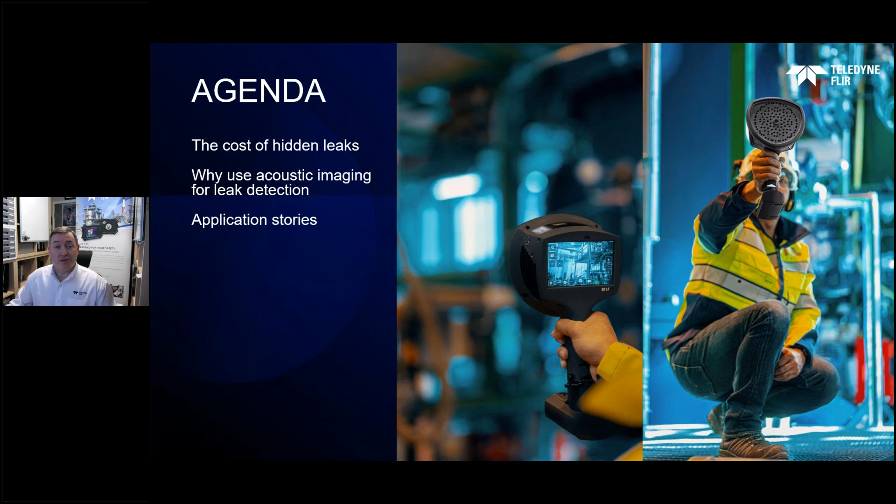So run through a quick agenda this morning. So we're going to look at the cost of hidden leaks, why we're going to use acoustic imaging for leak detection and what the benefits of it are. We're going to cover a couple of application stories of real life results with this equipment. We're going to look at achieving rapid ROI.

Return on investment is a big part of what we look at within Teledyne FLIR with our product range. Obviously, investing in any of our equipment is a big step for customers to take. And what we like to try and do is offer the opportunities to show what that return on the investment can be. And we've certainly had cases with acoustic imaging in particular, which have proved to be extremely fast return on investment cases.

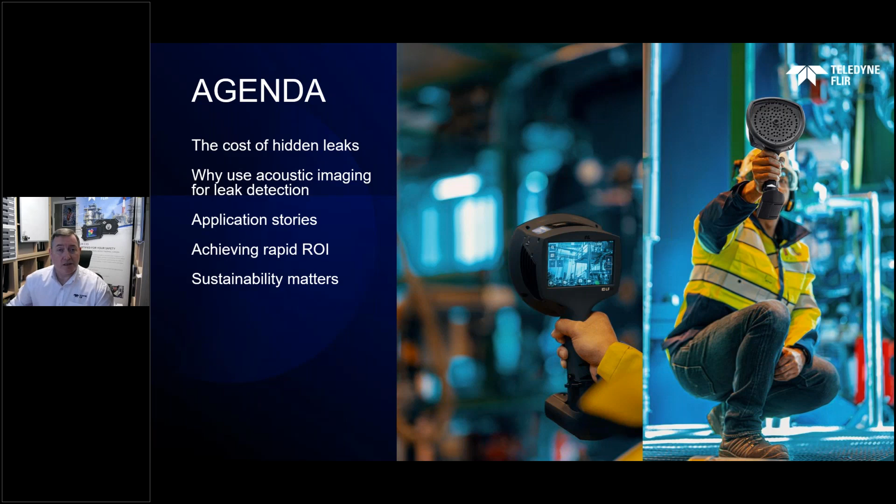We're going to do a little slide about sustainability, which in the current climate is obviously on everybody's lips. We're going to look at introducing the solutions that we have specifically for air leak detection. We're going to touch a little bit on software and reporting, and then we'll have the Q&A session at the end.

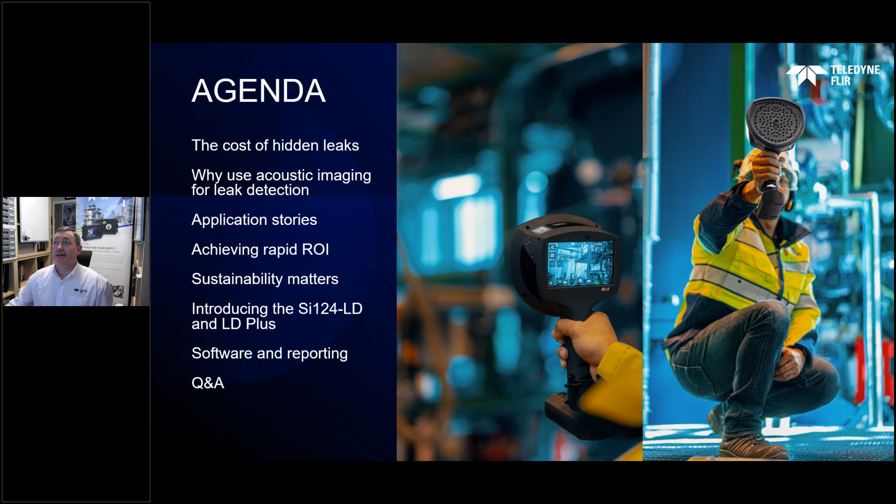So what I'm going to do now is I'm going to get rid of my face from this particular presentation so that you can concentrate on what's on the screen. You'll still be able to hear my voice from the ether, and we shall proceed.

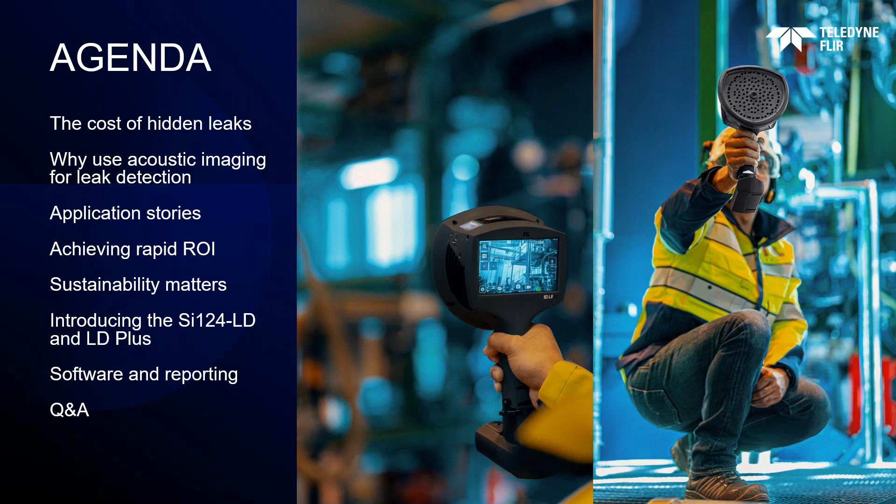Okay, so we talk about the benefits of sound, but more importantly, it's the benefit of actually being able to see sound. And that's a really powerful statement to be able to make with this type of equipment, because we obviously are all aware that we can listen to sound, but to be able to actually see sound and visualize where it actually is located is a very powerful tool. And what kind of benefits can that actually bring when we look at that ability to visualize those sound patterns? Well, we can find hidden problems.

And I can give you a real life case where I did a demonstration with an Si124 in an automotive manufacturing plant. I managed to find a leak in a nitrogen system, which was not at a termination or a connection. It was actually in the middle of a pipe. The pipe was pressed hard against the side of a machine. Every time that machine started up, it started to rub the surface of the pipe, and gradually over time it created a small hole.

Now, with the ability to use an acoustic imaging camera with its wide field of view, I managed to scan the area quickly and locate this particular leak. And upon further inspection, it was literally caused by this friction over time. There was a lot of background noise in this environment. There's no way that you would have been able to find that leak because you couldn't hear it for the start. You would never have seen that there was a problem with the pipe because the hole was on the side which was pressed against the machine.

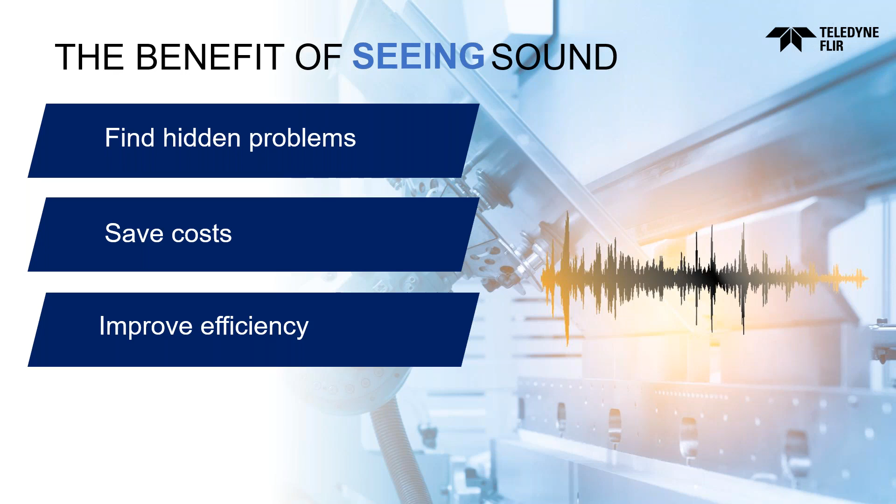We can also improve efficiency, whether that's improving efficiencies within the manufacturing operation or the production operation, or efficiencies within the way that, for example, a maintenance team may operate, but efficiencies can be gained on a number of different levels.

And then we can also ensure quality and safety, which in anybody's working environment are two words which people are really focused on all the time. So in one slide, these are only some of the benefits of being able to see sound with an acoustic imaging camera.

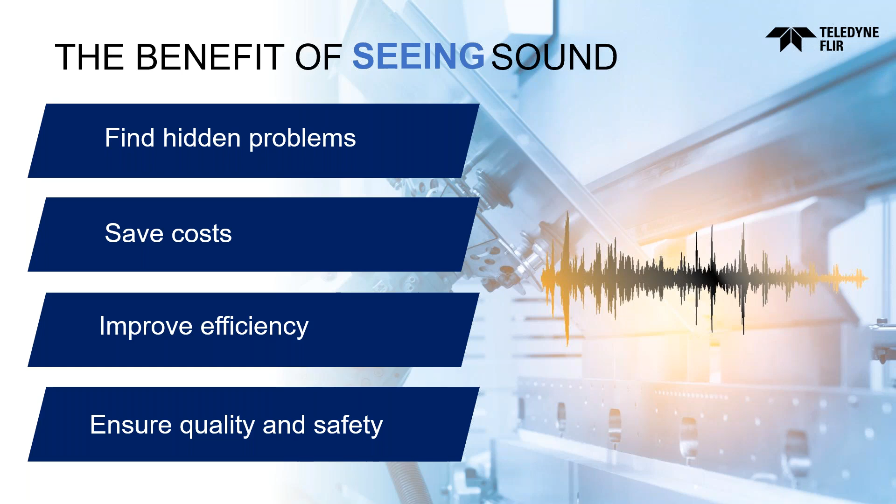So I've mentioned hidden leaks, and hidden leaks equal avoidable issues, because these kind of problems can be mitigated against with the ability to locate them quickly, because undetected leaks can lead to serious consequences within a manufacturing operation. And these can include increased energy costs, reduced operational efficiency,

unplanned downtime. And unplanned downtime in particular is a difficult problem for maintenance operations to deal with by its sheer nature. If a manufacturing facility is in full flow and there's a problem with a piece of equipment that causes that operation to stop even for a short time, it can be a severe issue getting that problem remedied, which can then result in increased maintenance costs.

Reduced service life of assets, because ultimately, if, for example, compressor systems are working far harder than they need to achieve the output that's required due to air leaks, then that's going to reduce the overall service life of that equipment. We can have the loss of costly specialty gases. I've already mentioned an example which involved nitrogen.

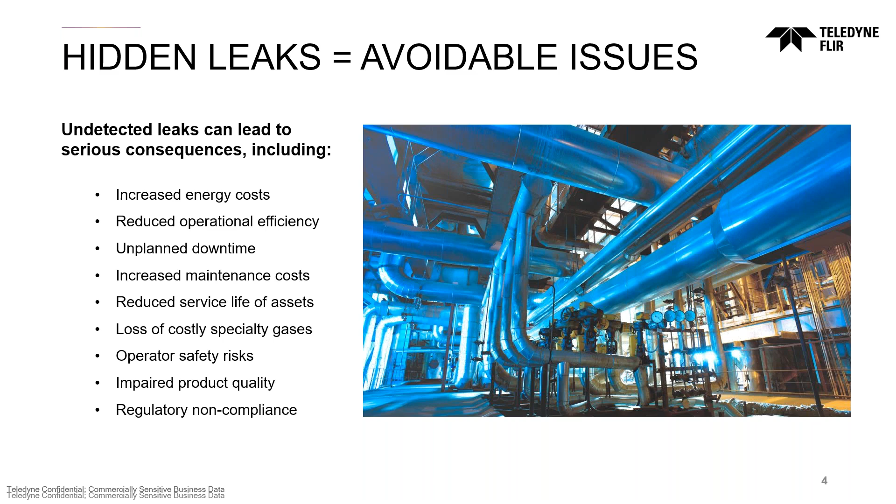So what are the real costs of hidden leaks? Well, generally, compressed air systems can lose 25 to 30% of air to leaks, and that straight away results in those higher energy costs. It also means that you may need to purchase extra compressor equipment to meet the requirements of the tooling that's being used because of that lost air. And then replacement equipment costs can increase as well.

So therefore, over the lifetime of some of these compressors, and some of these compressors are working major shifts of operation on a daily basis, 365 days a year, any potential of reducing the life of that type of equipment, which can be very expensive, needs to be mitigated against as much as possible. And as we've mentioned earlier on, the extra maintenance costs involved as well, with additional equipment being installed or repaired, is also a factor that has to be taken into account.

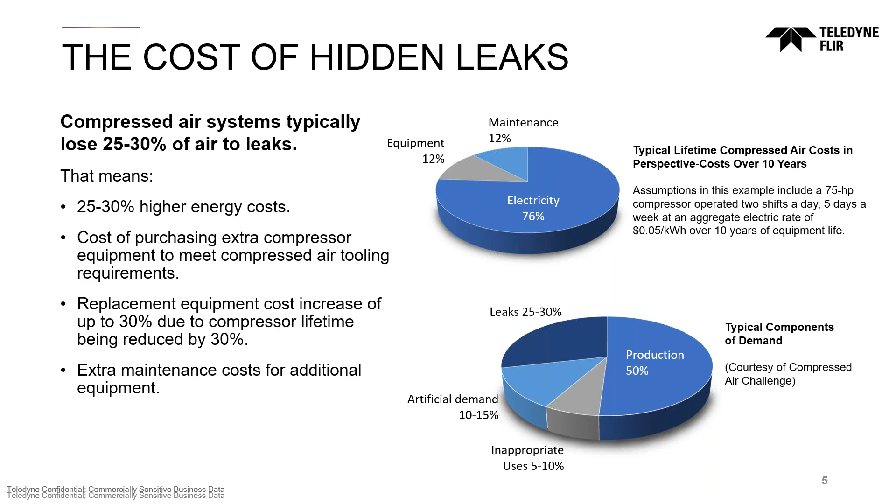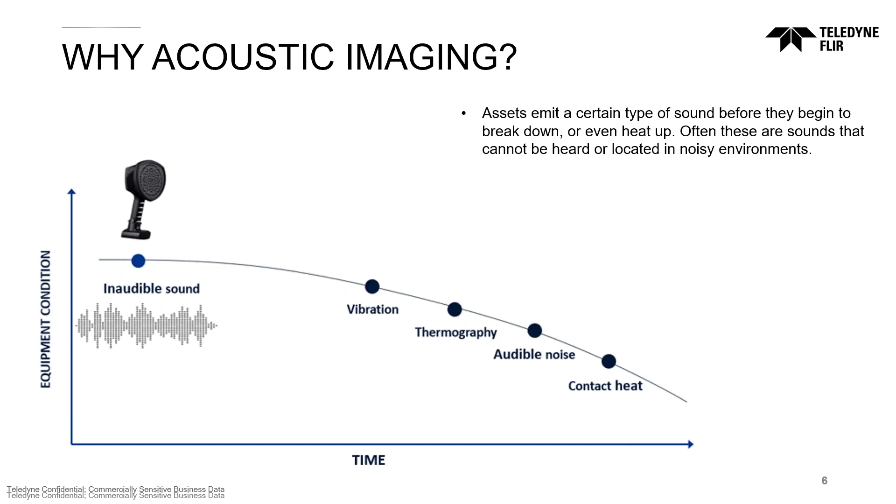So as an asset starts to deteriorate, it starts to emit a sound. And again, you can eventually pick those up with the likes of vibration technology, but ultimately those sounds are inaudible to begin with. And it's extremely powerful to be able to pick those problems up early on. So therefore, we can help prevent potential failures. We can help save money and time.

And ultimately, from a predictive maintenance perspective, which is the panacea for most maintenance departments, it gives us a really strong tool in the arsenal to be able to do that. But importantly, it's that ability to visualize those sounds in real time. So you can locate them in real time, quickly, efficiently, and accurately. And even more importantly, you can record that data.

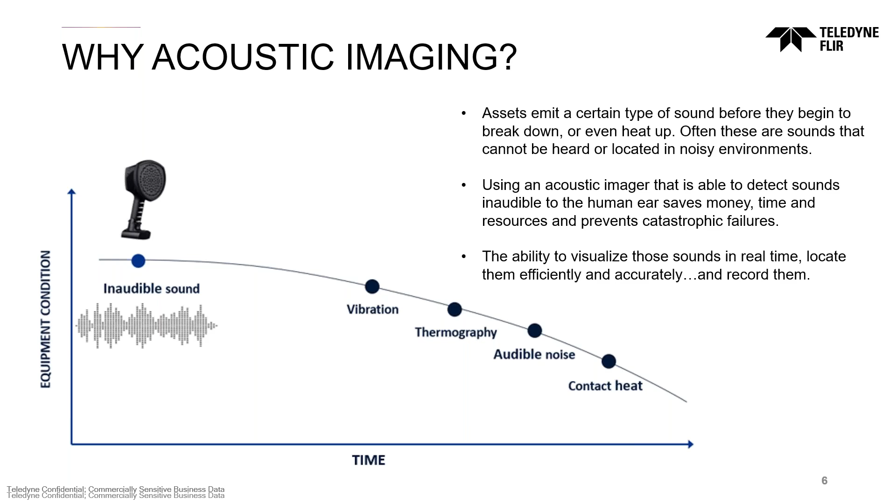For example, condensate traps. We can look at thread sealants, and also some types of valving. But ultimately, this is a snapshot of areas where you may have problems. I mean, I've done enough demonstrations now with the Si124 to know that every production facility has air leak problems. It's a question of how serious they are.

And ultimately, it would be very difficult for a production facility to fix every air leak. But it's those serious ones that are costing the most serious money. They're the ones you want to be able to find quickly. And the Si124 certainly allows you to do that.

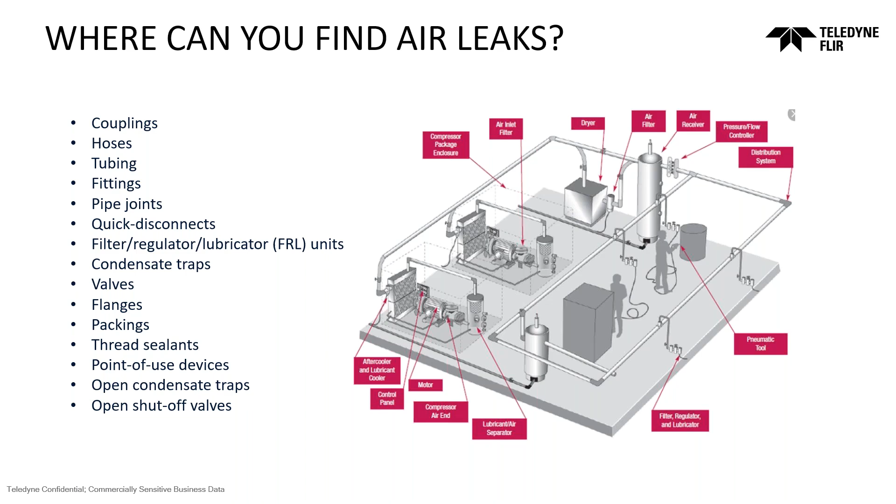So we have a little bit of an application story here in regards to enhancing quality and safety. Leaks can disrupt functionality within manufacturing equipment, which, as we've spoken about earlier, can lead to impaired product quality. That means you can have problems with the materials that you're producing. You can have excessive scrap being generated, or you can have contamination within the production facility, depending on what type of media you're working with.

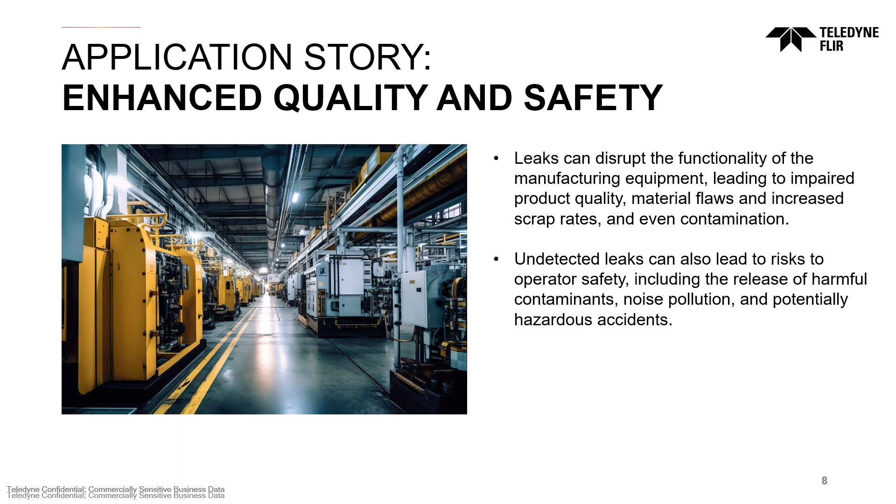And those undetected leaks can also lead to risks to operator safety, which could be the release of harmful contaminants, noise pollution, and potentially hazardous accidents.

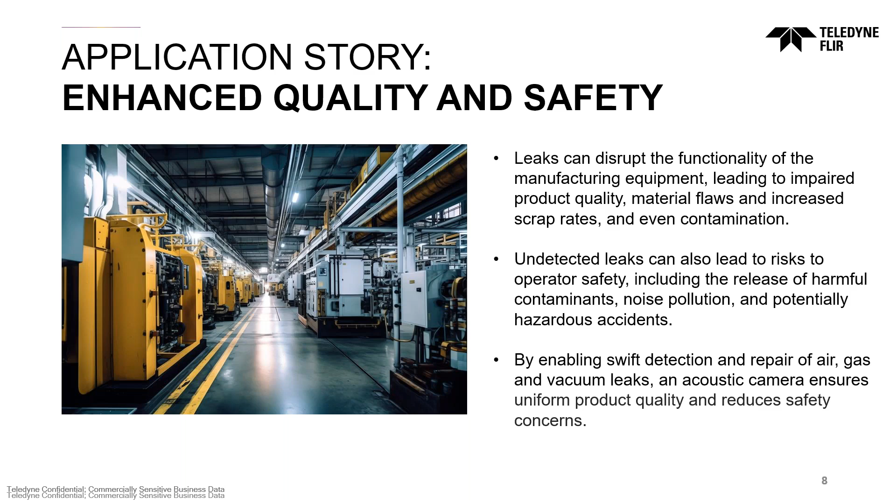But with that swift detection and the ability to then repair quickly those air, gas, or vacuum leaks, then the acoustic imaging camera can certainly allow facilities to be more uniform in their production quality and can help reduce those safety concerns.

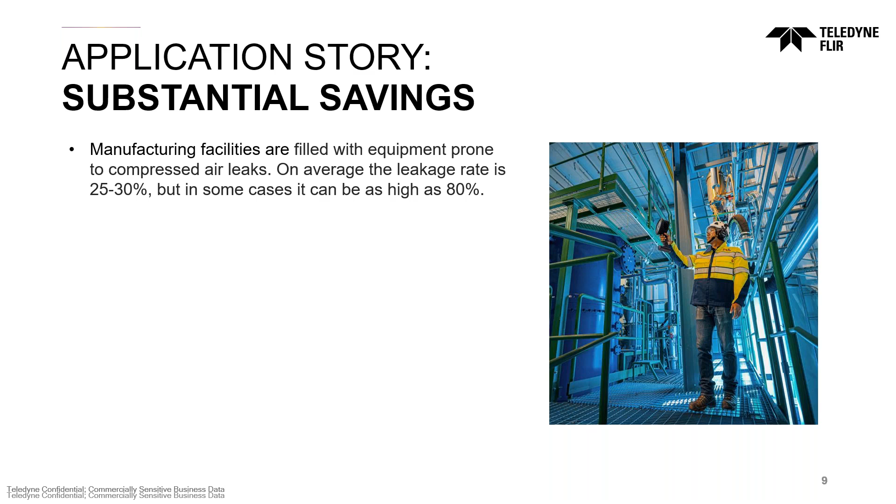So then we look at, well, okay, what are the potential effects on savings in regards to employing acoustic imaging within your facility? Well, we've already highlighted the fact that most production facilities, if not all, will have some kind of air leak, and some equipment is prone to air leaks as well. And we've given a figure of 25 to 30% as an estimate for a leakage rate, but in some cases it's been reported to be as high as 80%, which is extremely high and on the extreme end of the scale. But ultimately, if you don't know how much air you're losing, your facility could be losing a lot more than 25 or 30%.

And those hidden air and gas leaks do lead to those additional costs with the unplanned downtime and the potential safety hazards which can be created. They can also cause those substantial financial losses on the specialty gases. And I think that's the important thing to highlight again, is the fact that the SI124 acoustic imaging camera will listen for turbulent sound patterns created in the air through air leaks of any description. It's that movement of air which the camera will listen for and be able to visualize.

And it's that early stage ability to pick up on these things right at the start, a bit like when we looked at the chart earlier on, to be at the start of the chart before things start to deteriorate to the point where you do have to employ other types of technology, or it eventually catastrophically fails unexpectedly. Then it's a really important part to try and also hone a maintenance budget and stay within that budget.

Because the one thing I've picked up on in the many years I've been in the industry is maintenance departments generally have to do more. They have to do more with less people and usually with less budget. That may be a generalization, but I've spoken to enough maintenance managers over the last 20 years to be able to see that that's the way that the trend has gone. So maintenance operations in particular, or energy assessors, are certainly interested in any type of technology which can help them improve their operation.

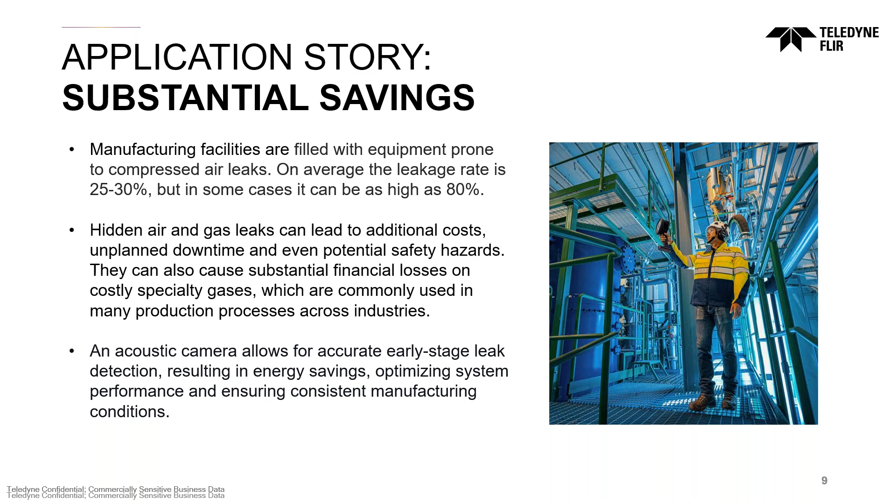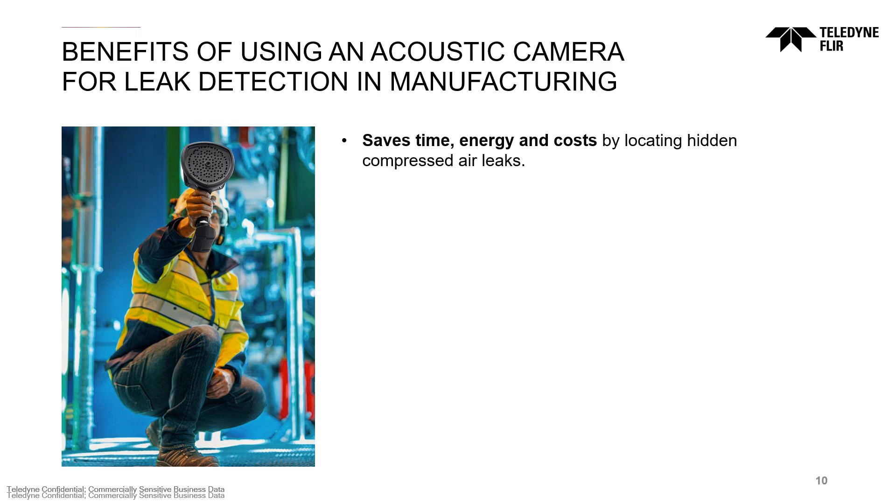So benefits of using an acoustic camera: save time, energy, and costs. I know I keep repeating the same things, but these are the key cornerstones that we're looking at with investing in this type of equipment. You're looking at increasing your operational efficiency by preventing that unplanned downtime. And again, this large area scanning, and me and the rest of the technical specialist team have visited sites, and we are well aware of the ability to scan large areas very, very quickly and pinpoint those problems accurately.

Minimal training is really required with this device, and this is where we're moving away from the traditional acoustic technology where you'd have the parabolic dish on a gun and you'll have a set of earphones on. And acoustic imaging is not trying to replace that. This is an addition to the acoustic testing technology, but it's a lot faster in regards to identifying leaks.

We can also carry out inspections without halting operations, which again, just like thermography, the ability to scan areas and pick up on issues while operations are in full swing is an important factor. And I'll say again, it's these real-time results, and it's real-time on the screen as well, which you'll see soon in regards to the amount of data this device can give.

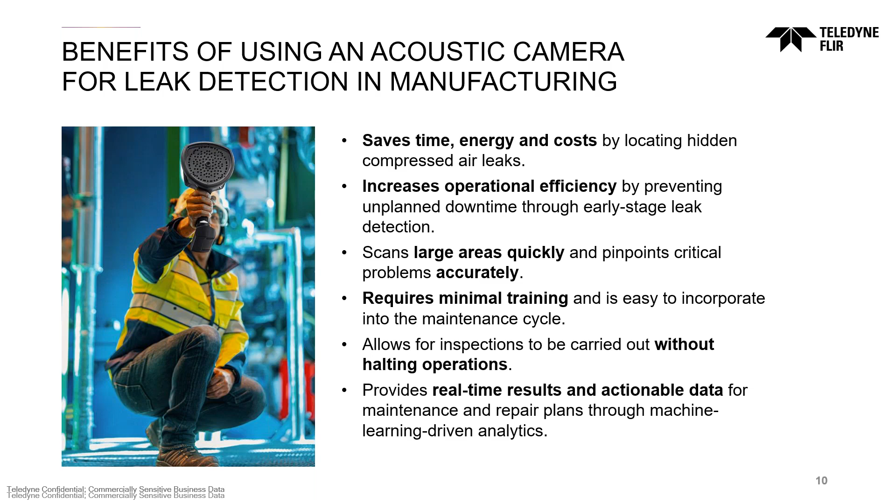Sorry, itchy trigger finger there.

So rapid ROI in a large facility. So this is a case that we've had within our business. Industrial operations are very noisy by nature generally, and therefore it is challenging to accurately find those particular leaks. But at a recent inspection, the SI-124LD, which is the latest addition within the leak detection range of cameras, was able to identify 155 leaks in just 6 hours within a 6,500 square meter manufacturing site, with their ROI, return on investment, estimated to be 4 to 6 months.

Now that's one example. We've had examples which are faster than that. I had a recent case within the last 3 weeks where I visited a manufacturing facility, actually to demonstrate a different product, but I was able to show them the SI-124.

There was actually a leak in the office that we were in, which was the reason why I was able to show them. I then gave one of the maintenance operators the camera that he'd never seen before. I was able to show him how to operate it very quickly. He then went out onto the production line and he came back in within about 15 minutes with approximately £9,000 worth of leaks that he'd identified.

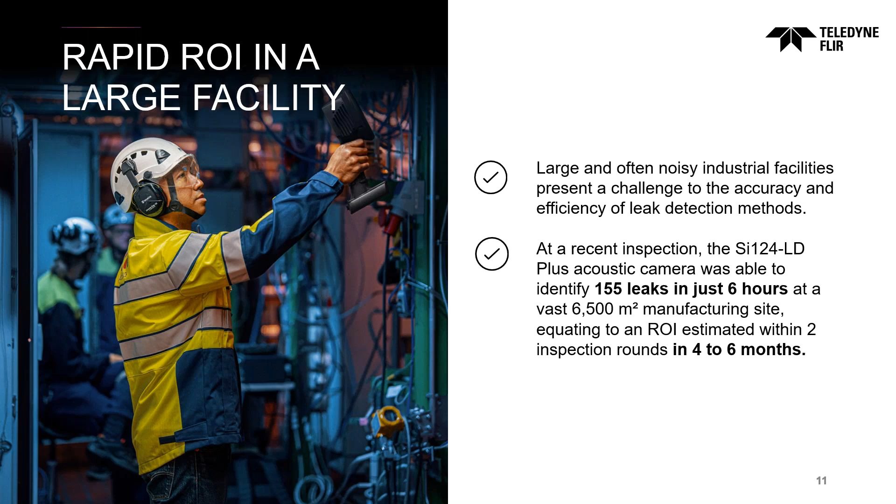Now, again, could be at one end of the extreme range, but certainly I've been on enough visits personally to know that this device really does have that power to be able to pick up really bad leaks quickly, and therefore put you in a position to be able to resolve them.

Gases, again, we talked about, but CO2. CO2 is used a lot within the food and beverage industry, for example, amongst other types of manufacturing. And then we have argon and nitrogen and many others, which are far more costly than compressed air. And then during a recent inspection, not mine by the way, but within the business, it was able to locate 5 specialty gas leaks within 10 minutes, resulting in annual savings of approximately €12,000 and an estimated ROI within just 2 months. So these are real life cases based on experience that we've had.

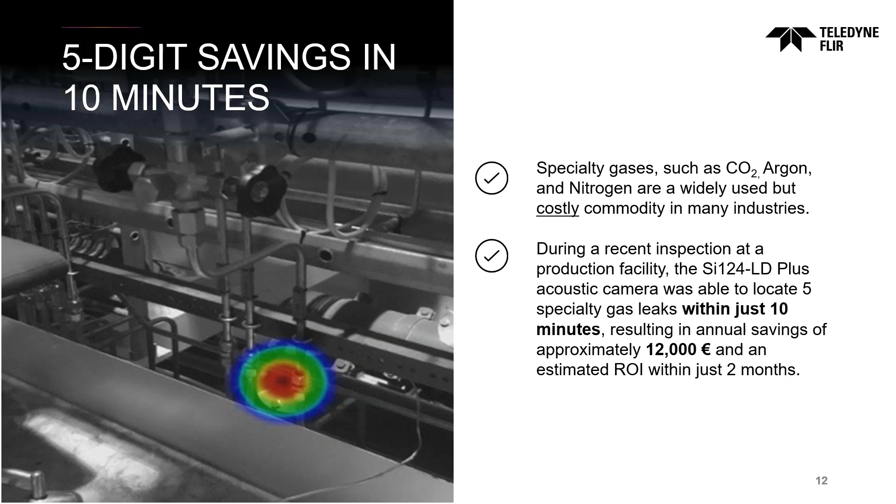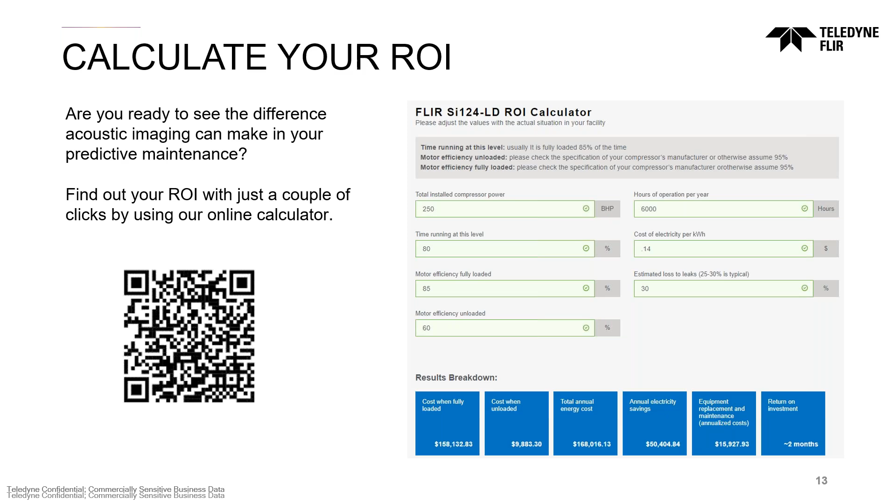But ultimately, this is what the tool allows you to do. There's some parameters that you have to enter, but then ultimately you can end up with a breakdown of results at the end. So certainly after this webinar is completed, by all means, take a look at the ROI calculator that we have. It's a very useful tool and could certainly help you.

Okay, a little bit on sustainability. It's something that everyone's trying to strive to be more sustainable as businesses, and ultimately something as simple as identifying and repairing an air leak promptly. The knock-on effect of that is to help minimize energy consumption and carbon emissions, and can contribute to a greener manufacturing process, aligning with sustainability goals.

This is probably not the time to have a coughing fit, excuse me.

Improving energy efficiency. Timely leak detection ensures that energy is not wasted on compensating for air leaks, with that extra work compressors have to do, because potentially 25–30+% of that air is going out into the ether. So therefore, it also helps reduce the environmental impact on your operations as well.

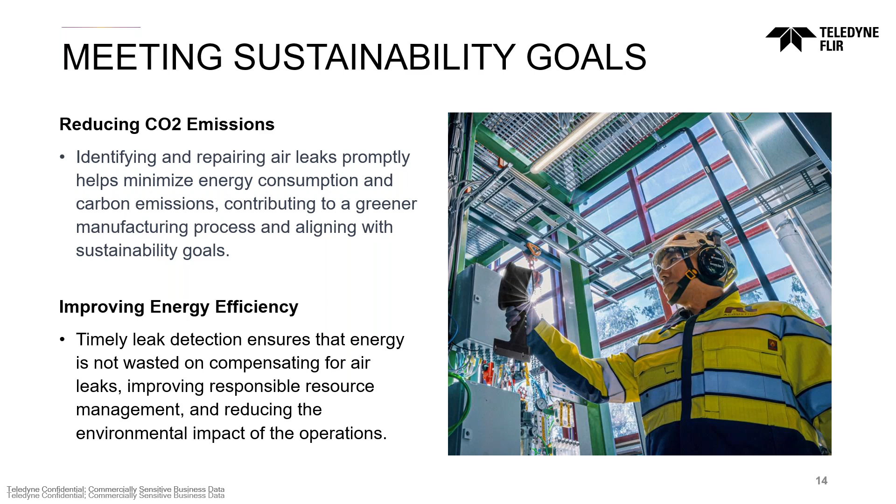So when we look at Si124-LD and LD Plus as a benchmark, the LD and the LD Plus are the 2 models that we have within our range of solutions for leak detection specifically. The Si124 family as a whole incorporates models which can also detect partial discharge, which will be a separate discussion. But LD stands for leak detection. So if you're talking about an Si124-LD or LD Plus, then you're talking about a device specifically optimized for compressed air leak detection. So best performing acoustic imaging camera range, saving time, costs, saving energy.

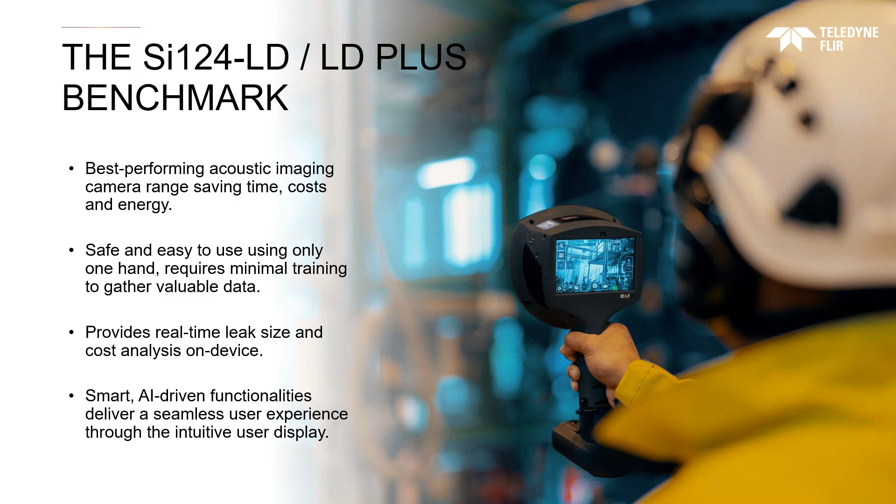Safe and easy to use, very easy to use. Using only one hand, it's just like holding a thermal imaging camera. It is one-handed operation. You can actually operate and capture images with your thumb on the screen as well. So you can hold and capture images with one hand to gather that valuable data. And it provides real-time data on leak size and also the knock-on cost for that leak. And then this is an AI-driven device which has functionalities which allow the user to have a really good and seamless experience, because the display is very intuitive to use.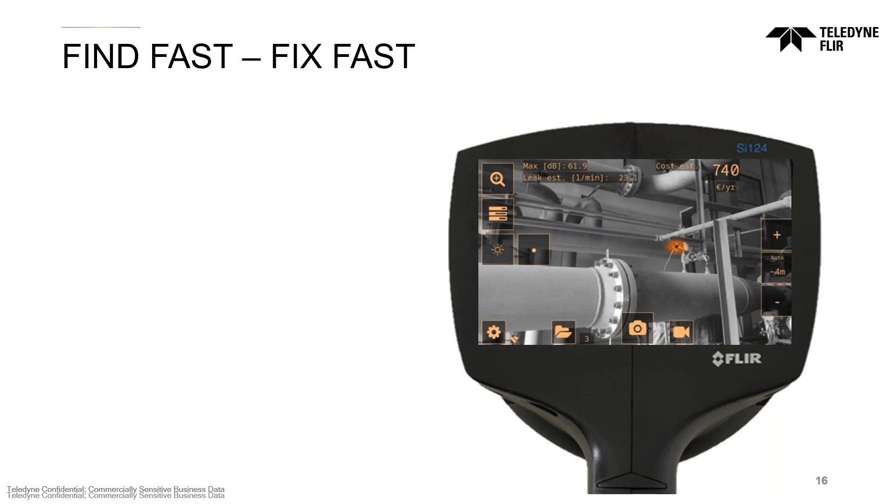So, rear view of an SI-124 camera: find fast, fix fast. I mean, literally, that is what it says it is. You can find the leak fast, and it allows you then to fix it fast. So what we see here is we have a little heat map marker, which is located on the screen. So those 124 microphones are looking out at that field of view. It's detected. It's actually set up in this case to detect one.

Let's get my laser pointer working. So on the screen here, it's set up to detect one source of sound. Now this can be changed to multiple sources, but ultimately the worst leak in the field of view will always have a crosshair on it. So it's handy to know that you can detect multiple leaks at one time if you change the setting here on the screen. It's a simple press of this icon. But the worst leak within that group will always have a crosshair. At the moment, this is set up to be as a single leak device.

So each sound source is also indicated with a color. So what the device allows you to do, if you walk into a large area and it picks up a leak quite a way away, now the specification within this device operates up to 130 meters. If the color of that leak on the screen is not green and it's orange or it's red, you know straight away, just from a color perspective, that that's a bad leak, especially if it's red. So it's a strength marker. So it's indicating the strength of that leak, even from a distance, even before you have an accurate assessment of the leak estimate in liters per minute, or whether it's the cost.

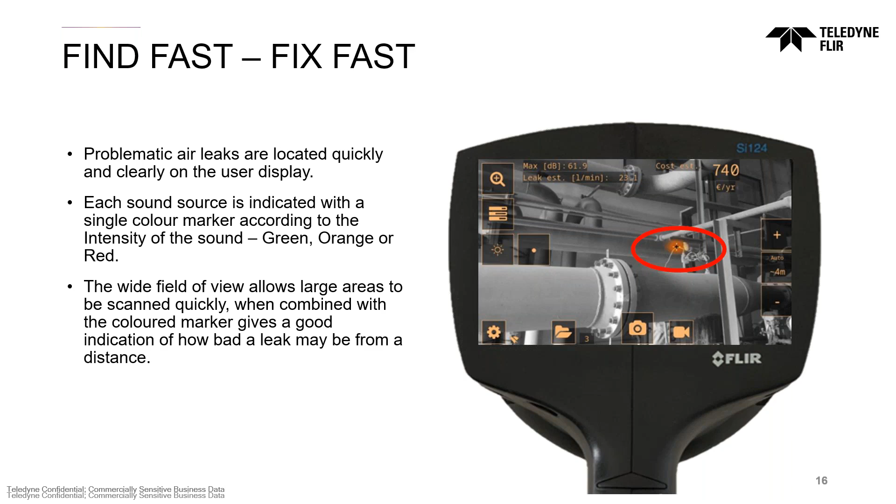Actually, visually, you can sweep an area really quickly, and even the color of the marker will denote whether that's a really serious leak. And I've been on visits myself where I've picked up on leaks which are not just green. They are orange or even red in some cases. So this is a really good visual tool to be able to pick up that information. And I've already said it, but it's that wide field of view. So you combine the wide field of view with the colored marker, even before we start looking at numbers and data. It's a really good tool for identifying those leaks. And as I've already said, the multi-source mode will allow you to identify the worst leak within a group as well.

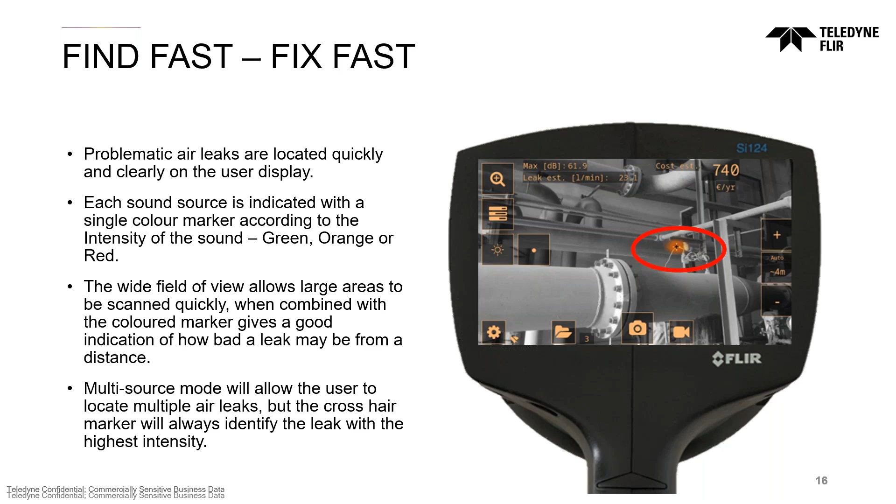So we talk about real-time data, and again, this is the information which you can get from an SI-124 on the screen. So the leak rate, or the leak size, which can be in liters per minute or cubic feet per minute. It's up to you to set that parameter. It's based on the sound intensity of the leak, the distance, and the specific power of the compressed air system. And all this data can be entered into the device.

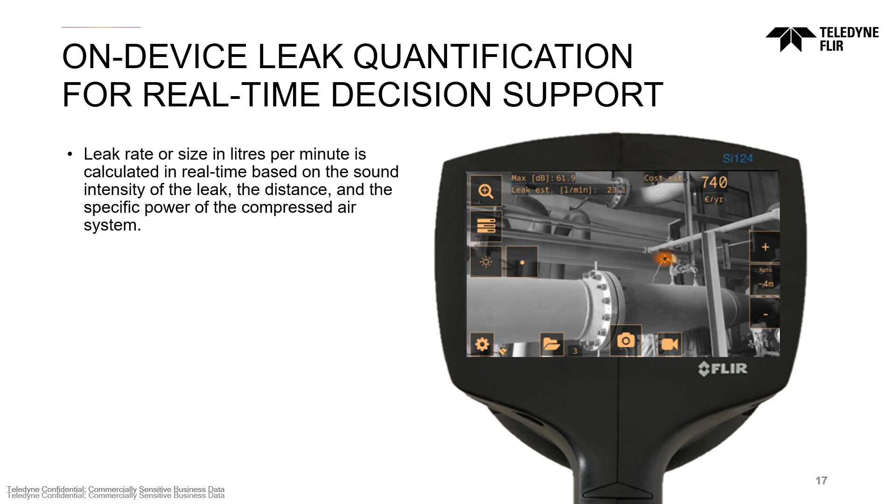So in this area here, we can see the decibel level. And what you'll notice on this area when you're actually using this camera, as you move towards the source of the sound that you've identified, you will see that decibel level increase. And ultimately, although this camera can operate up to 130 meters, for the best results, you need to get as close as you can to the source of the sound as safely as possible.

The advantage of this device being non-contact, it means that you can be further away, but we also have the ability to utilize a zoom feature here. So there's a 2x digital zoom feature on the camera, which you can utilize to get that bit closer without physically having to move closer if it's not safe to do so. But the best results you get with sound patterns is to get as close as possible to the sound. So the ability to identify an air leak up to 130 meters is great. But ultimately, you always try to move as close as you can to get the best result that you can, to get the most accurate data.

And what we can see from this particular part here is decibel level, and then there's your leak estimate there. So 23 litres per minute in this case. You will have entered a kilowatt hour figure into the device before your inspection, and based on that kilowatt hour figure, the camera will then tell you what the overall cost over the year will be. So what we can see in this case is over a year, that particular leak was costing approximately €740. So that's that real-time data you get off the camera straight away.

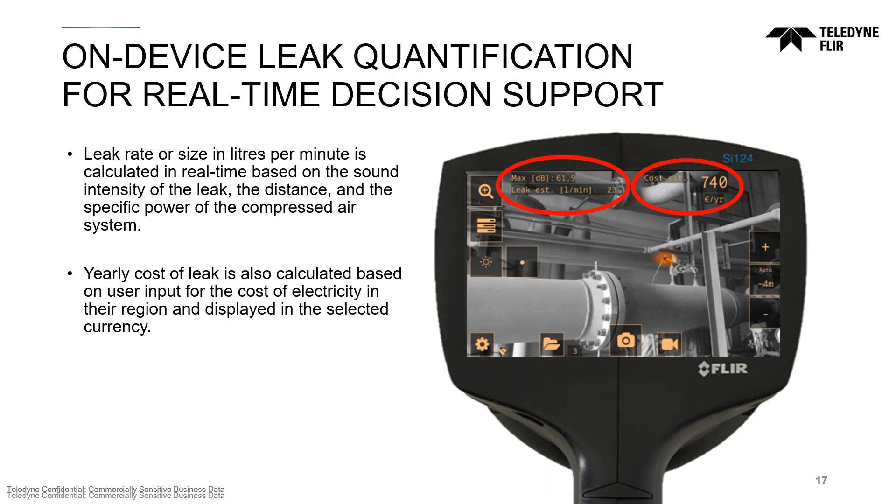So we talk about solutions. So we've got two solutions for leak detection. We've got the SI124 LD, 124 relating to 124 microphones, and we have the LD Plus. So the frequency bandwidth that these cameras operate within is the same, so 2 kilohertz to 65 kilohertz.

And the majority of industrial noises we deem to be around the 20 to 30 kilohertz range. And those lower frequency sounds do actually travel further as well, which is something to take into account. I've already mentioned that it's up to 130 meters in regards to operation. But importantly, in this case, the difference within these two models is the LD Plus is a more sensitive camera, based on minimum detection levels at 1.2 bar and from less than a meter away.

With the LD model, you've got 0.016 liters per minute minimum detection. LD Plus, you've got 0.004 liters per minute. So the LD Plus is a more sensitive camera. The LD Plus also brings to the functionality of the camera an automatic frequency filter. And ultimately, that's the ability to filter out that background noise and really highlight what the problem noise is. The filter systems within both cameras do that very, very well.

With the LD, you can select those frequency filters manually. With the LD Plus, it will do it automatically. It will listen to the ambient sound, and it will operate within the filter it deems to be best at the time in that circumstance. And then with the distance that we talked about on the screen, you can manually select distance on the LD version, but on the LD Plus version, it has an automatic facility which operates up to 5 meters.

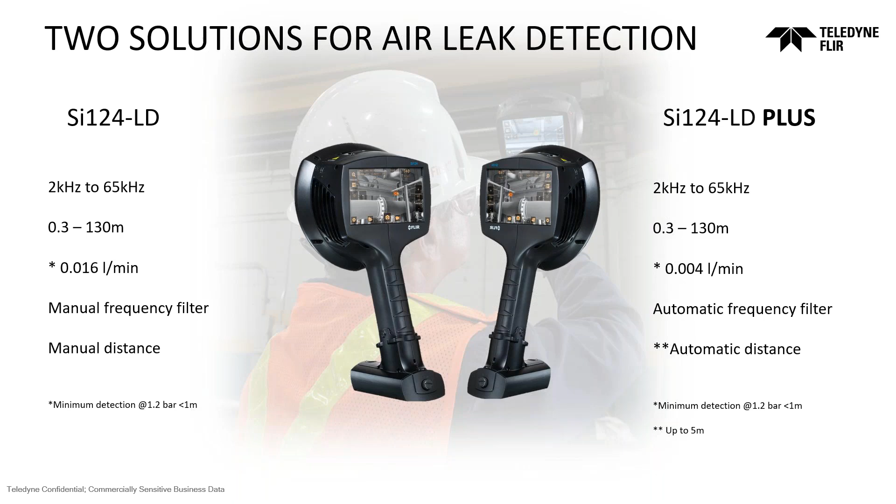And this is a close-up of the screen that we can see here, plus and minus. In this case, it's from an SI124 LD Plus, because there's an auto feature there, because it's about 4 meters away. But again, it's that auto filter, auto distance, which are the key differences when coupled with the additional sensitivity.

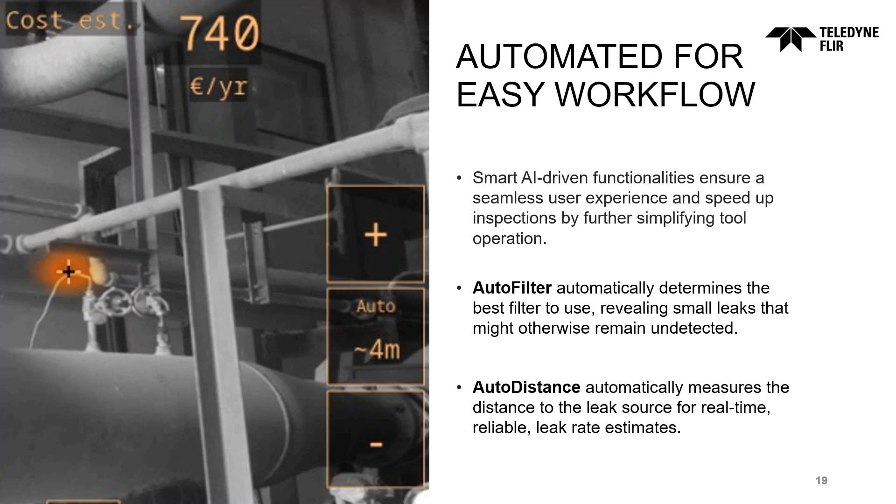ISO 50001 reporting compatibility. I think for anyone's operation in regards to being able to improve your energy management systems using ISO 50001, ultimately, it's the ability to be able to record the data, which is really important. And within the SI124, we have the ability to set up a cloud account as an online viewer, or certainly for existing users of

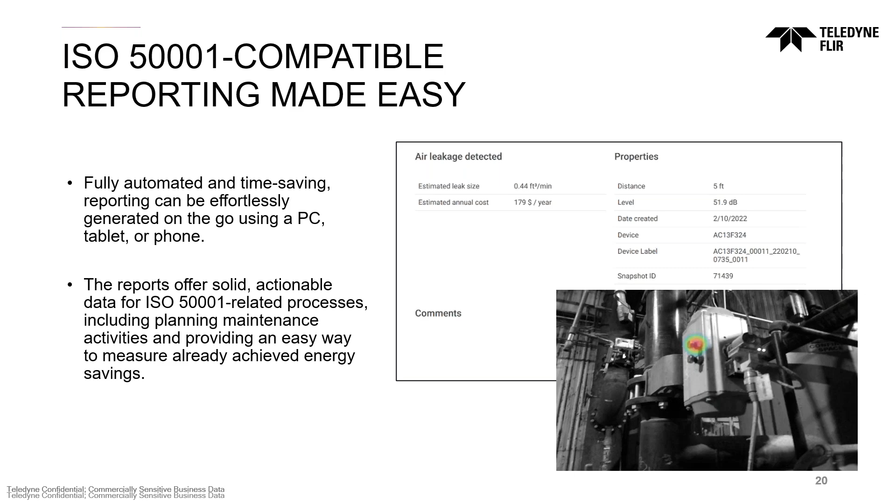our thermal imaging technology, the SI124 is compatible with Thermal Studio Pro. So anyone who's currently using thermal cameras from Teledyne FLIR can make a small investment in a software plugin, which allows you then to utilize Thermal Studio Pro. You can even combine reports if you wish for acoustic and thermal. This is another advantage from our perspective, the ability to use the software ecosystem that we have.

And again, this is just a very simple report shown on the screen, but it gives you the data that you need. Ultimately, what you need an acoustic imaging camera for, you want to be able to find leaks quickly, fix them quickly, and be able to cost them. And this kind of information can be entered in a report, which from a recording perspective and to align with ISO 50001 can be important moving forward for yourselves.

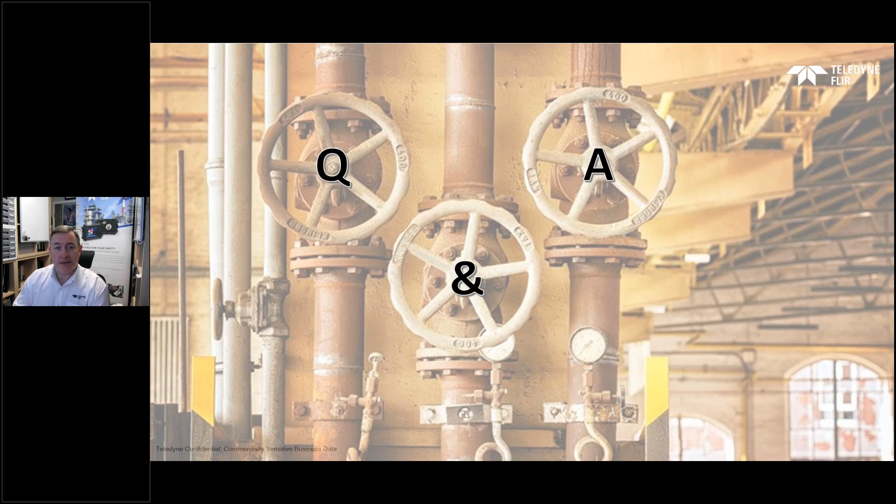Okay, can we go deeper into visualizing vacuum leaks, please? I think what I would say at this point, there will be other webinars which go into more technical detail. I know that the idea of this webinar today was to give sort of a broad-based brush over where acoustic imaging can fit into manufacturing.

There's a lot more detail to talk about, and we've got other capabilities within the SI124 camera range. I mentioned partial discharge, which is another webinar in itself. But this is a very, very powerful piece of equipment. And certainly, the devil is in the detail. And from my perspective, we can certainly look at offering more follow-up information from a technical perspective.

I think as well, the question was asked about quantification. What we have to understand is that the SI124 is optimized for compressed air. So any cost calculations on the device relate to compressed air only. Again, that doesn't mean that you can't find leaks with those specialty gases. And what you can make is a judgment call on what the cost could be.

For example, if nitrogen is 5 times more expensive than compressed air, you can give an estimate of what it could be costing. So the camera will only quantify the cost calculation related to compressed air, but you can make a judgment call yourself in regards to the additional cost of any specialty gases.

As far as hazardous areas go, no, this unfortunately is not an ATEX-rated product or intrinsically safe product. Not at the moment. But obviously you do have the benefit of distance, and depending on the sound frequency, you may be able to pick up air leaks well out of a particular zoned area, but it's not certified for that type of use.